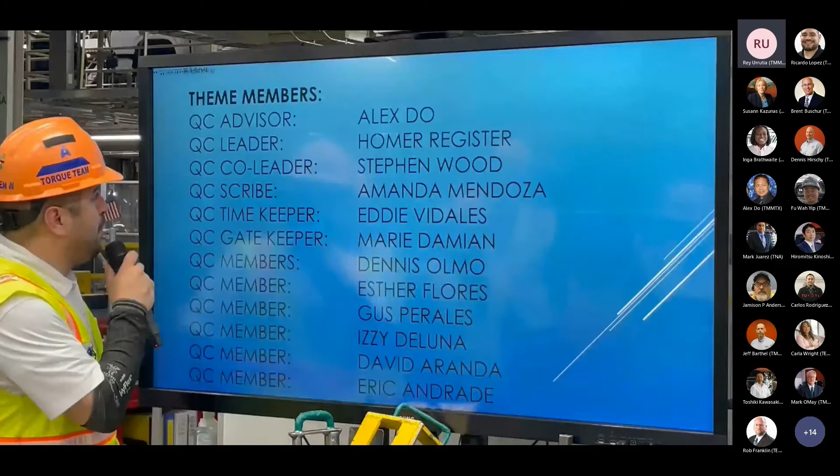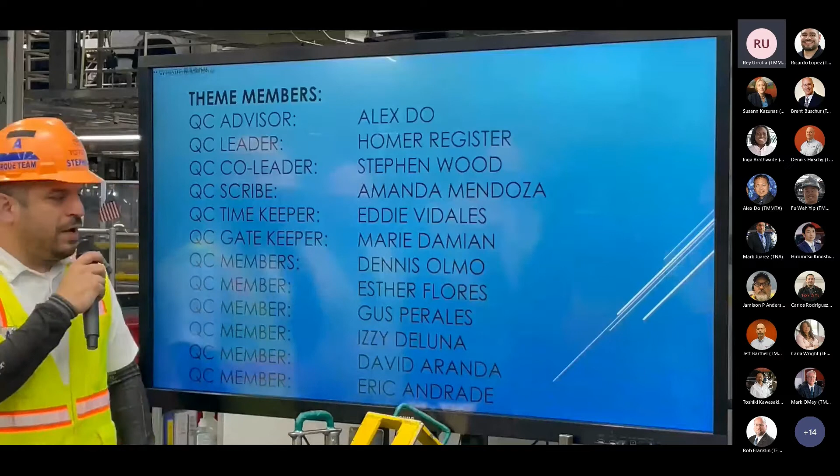Our theme members are Advisor Alex Do, our leader Homer Register, our co-leader Stephen Wood, our scribe Amanda, our timekeeper Eddie, our gatekeeper Marie, our members Dennis, Esther, Gus, Izzy, David, and Eric.

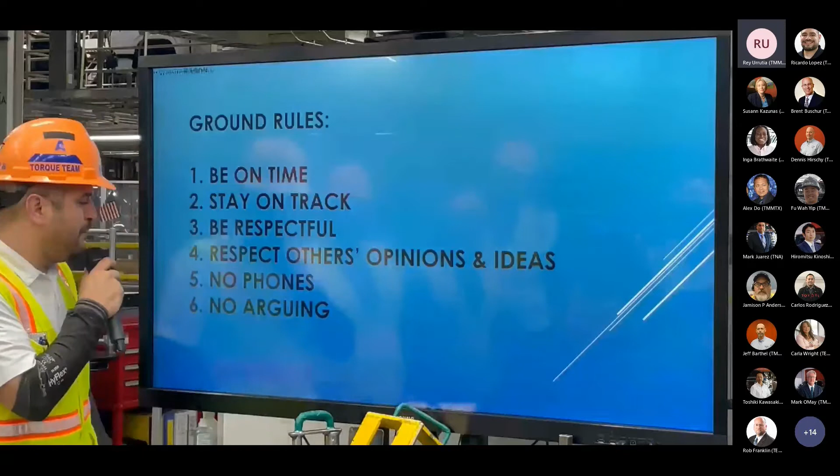Our ground rules are: 1, be on time; 2, stay on track; 3, be respectful; 4, respect others' opinions and ideas; 5, no phones; 6, no arguing.

The first step we had was clarify the problem: reduce the potential safety risk for Torque team members while performing their processes.

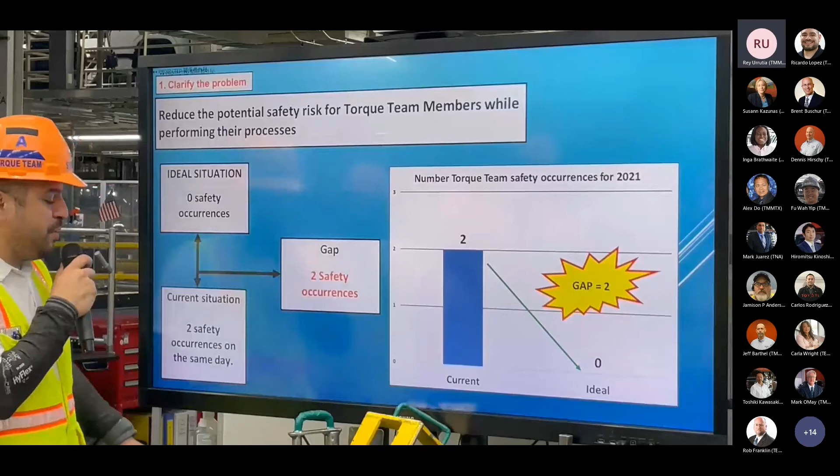The ideal situation is 0 safety occurrences. Our current situation is 2 safety occurrences in the same day, with a gap of 2 safety occurrences.

The number of Torque team safety occurrences for 2021 was currently 2, with the ideal of 0, a gap of 2.

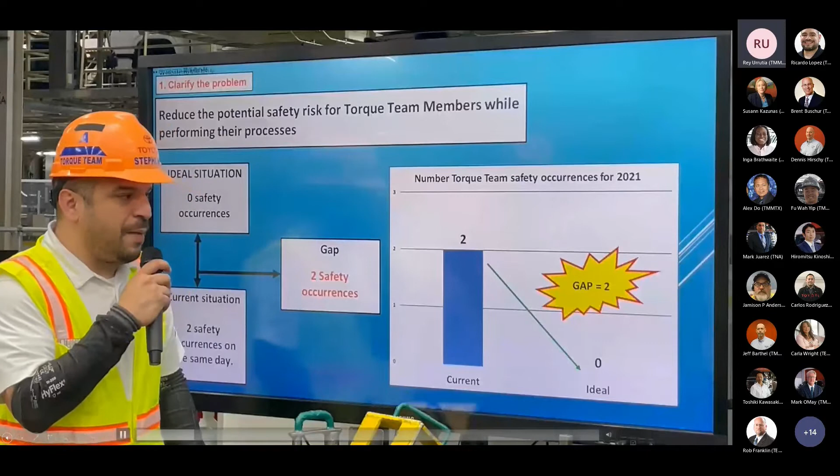Thank you, Stephen. Step number 2 is breaking down the problem. Assembly Torque Team 2021 safety incidents at 2.

All other issues 0. Knuckle assembly falls off skillet during torque checks is 2. Tundra 0, Tacoma quantity of 2. 4x4 0, 4x2 quantity of 2.

Lower ball joint torque check 0. Castle nut torque check 2.

Torque team member prepares for torque check. Torque team member notifies team member that they are going to check the next truck's castle nuts. Team member shoots castle nut, leaves castle nut to have its torque checked by torque team member. Torque team member checks castle nut, then checks to see if castle nut is lined up for cotter pin.

Our point of occurrence is if castle nut is not lined up to accept cotter pin, torque team member toggles castle nut. Torque team member leaves castle nut ready to accept cotter pin. Process team member finishes standardized work.

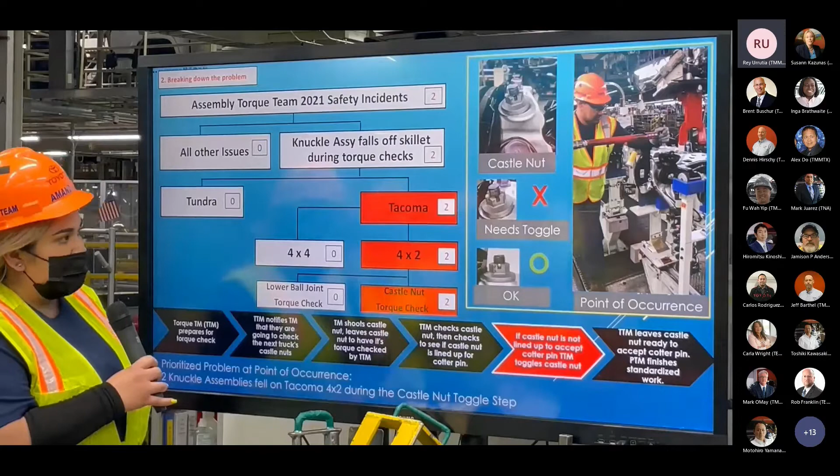Our first picture up here is a castle nut. This second picture is a castle nut not lined up, needs to be toggled. Our third picture is the castle nut lined up perfectly for a cotter pin.

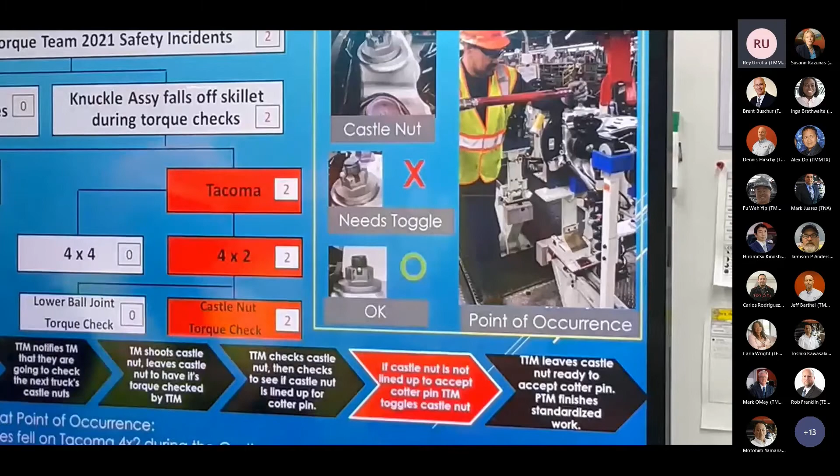Prioritize problem at point of occurrence: 2 knuckle assemblies fell on Tacoma 4x2 during the castle nut toggle step.

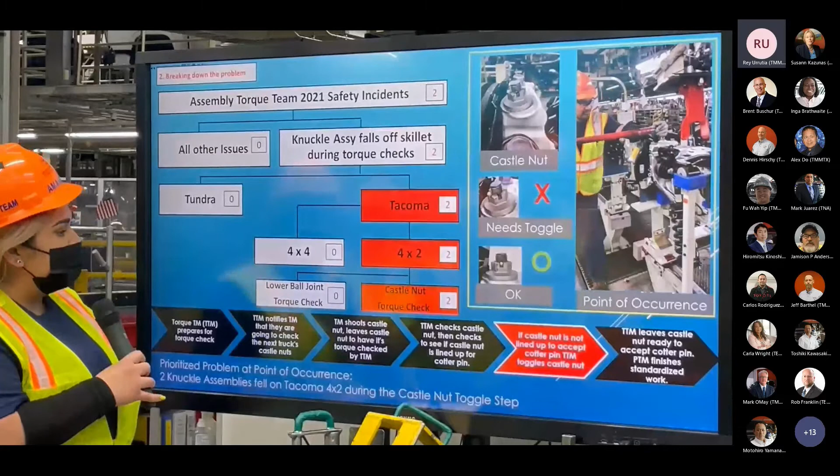On the next slide, we'll have a video of our point of occurrence. No good condition. Unstable without the use of a knuckle holding jig. As you can see at the bottom of the stand, there's no jig there, which leaves the A-arm open to fall open on torque checks.

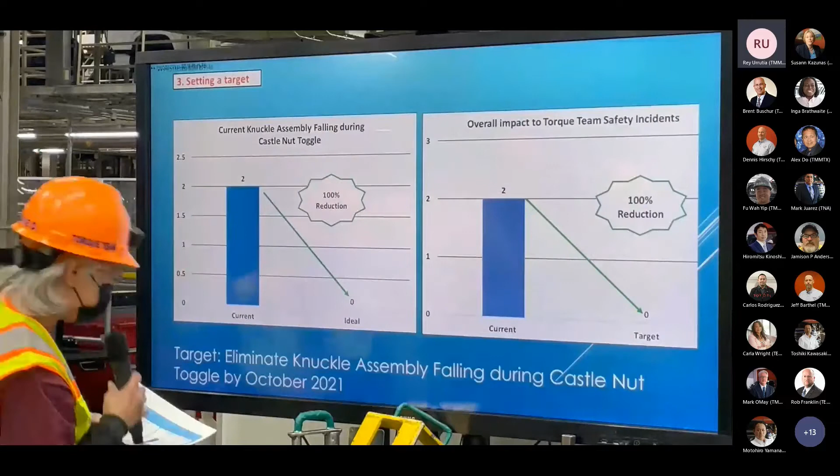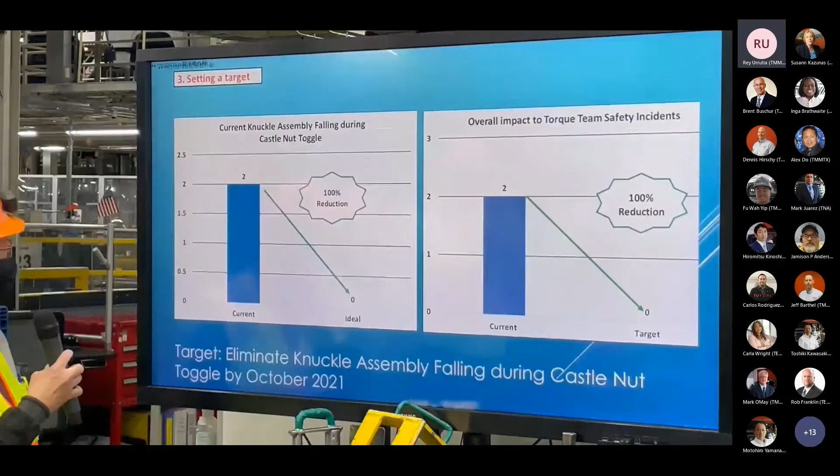Thank you, Amanda. Step 3, setting a target. The first graph shows the current knuckle assembly falling during castle nut toggle. The current situation is 2, and the ideal situation is 0, with 100% reduction.

The overall impact to torque team safety incidents: current situation is 2, target is 0, at 100% reduction. The target is to eliminate knuckle assembly from falling during castle nut toggle by October 2021.

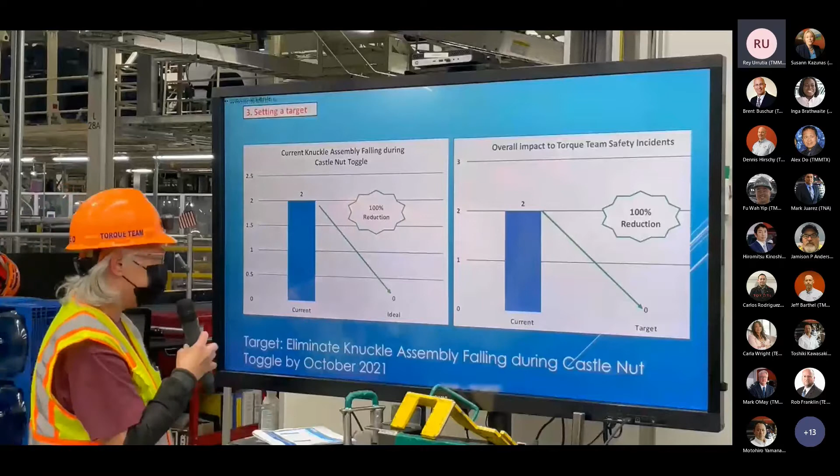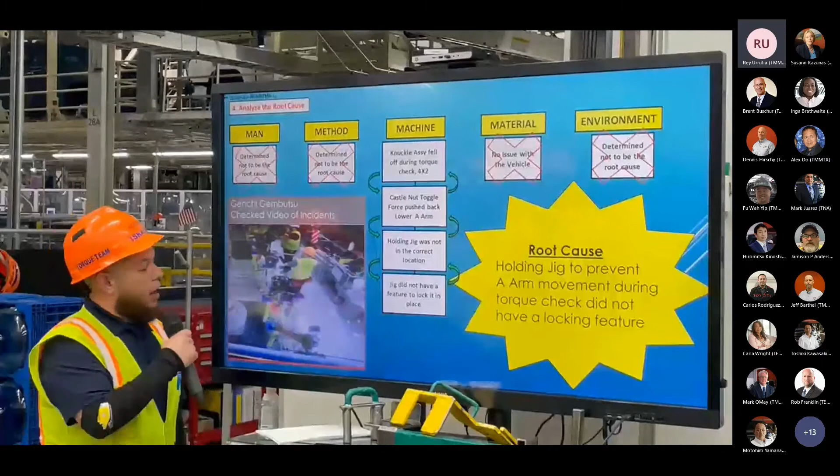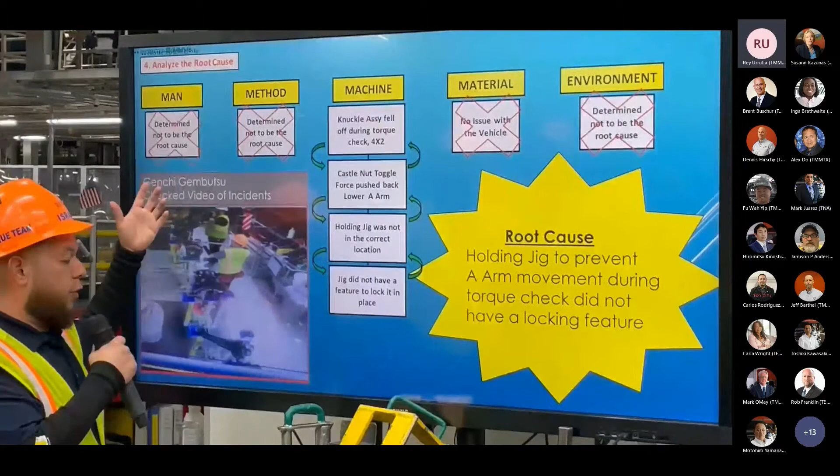Thank you, Marie. All right, number 4, analyze the root cause. So we analyzed the root cause, and as we did so, we eliminated man, method, material, and environment as potential root causes, and came to the conclusion that machine would guide us towards the actual root cause.

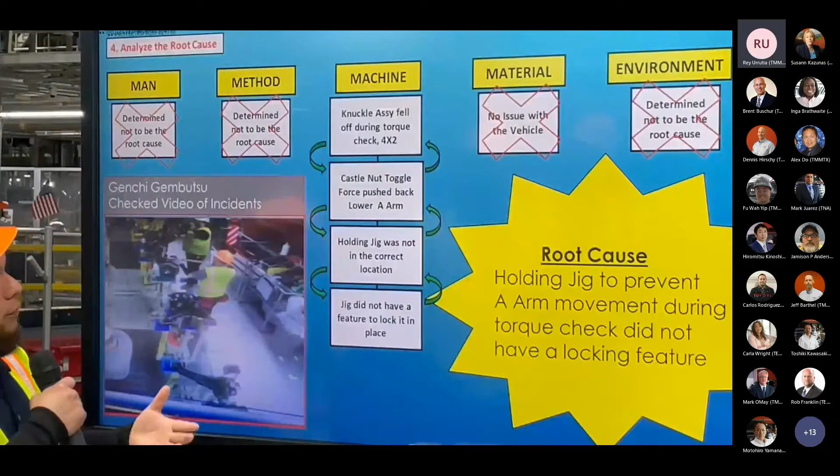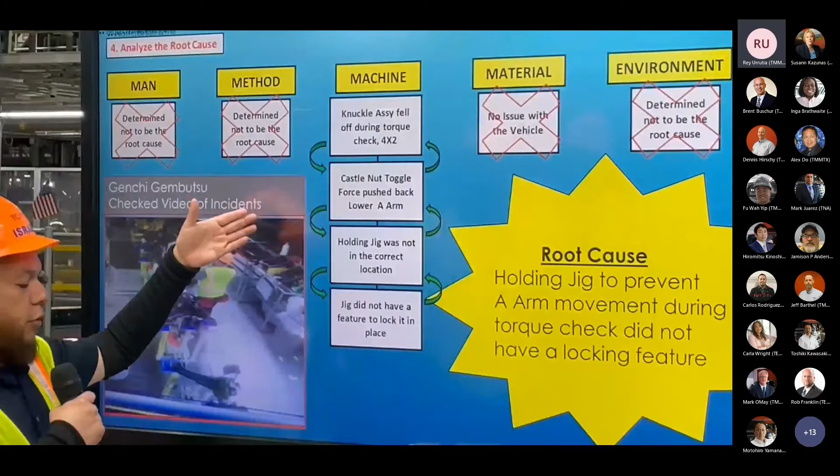So what happened was the knuckle assembly fell off during the torque check on a 4x2. Why? Because the force of the castle nut toggle pushed the lower A-arm back. Why? Because the holding jig was not in the correct location. Why? Because the jig did not have a feature to lock it into place.

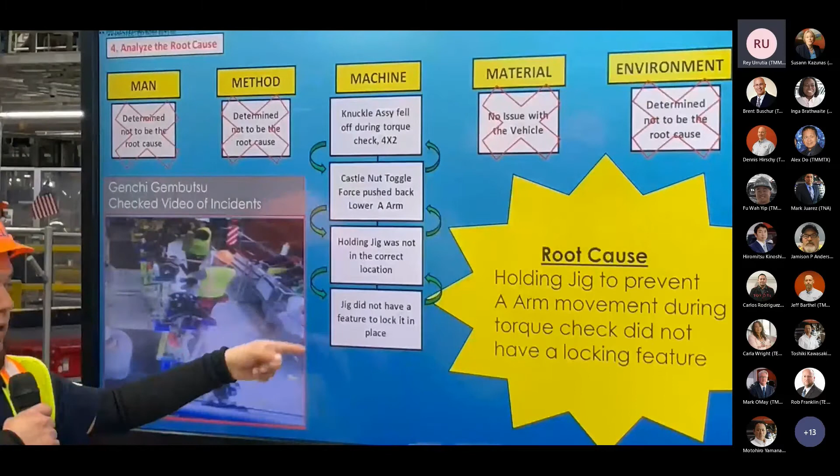This is the video. I was the actual team member that this happened to. If we can go ahead and roll the video: initially I take the torque check, and then next I have to toggle to allow the cotter pin to have a path. If you look right here, the holding jig falls as I'm trying to toggle. Team member comes over, team leaders come, and they try to help. This is the point of occurrence, and I'll be handing this off to Eddie.

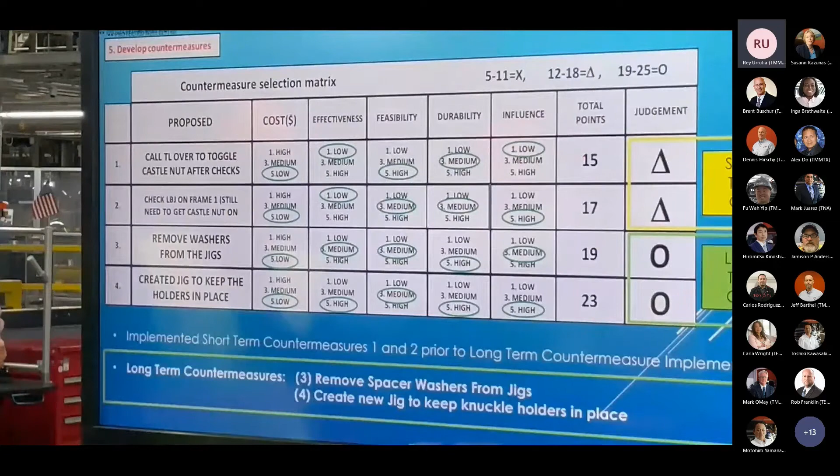Thank you, Israel. Next, we have step 5, developing countermeasures. Using the countermeasure selection matrix, we came up with 4 proposed.

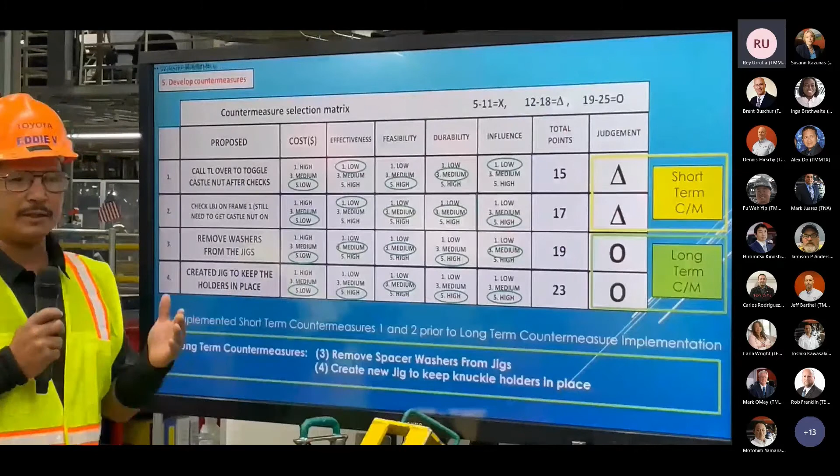The first one being calling team leader over to toggle the castle nut after checks, for a score of 15. The second one was torquing the lower ball joint on frame 1, still needing to get the castle nut on axle line, for a score of 17.

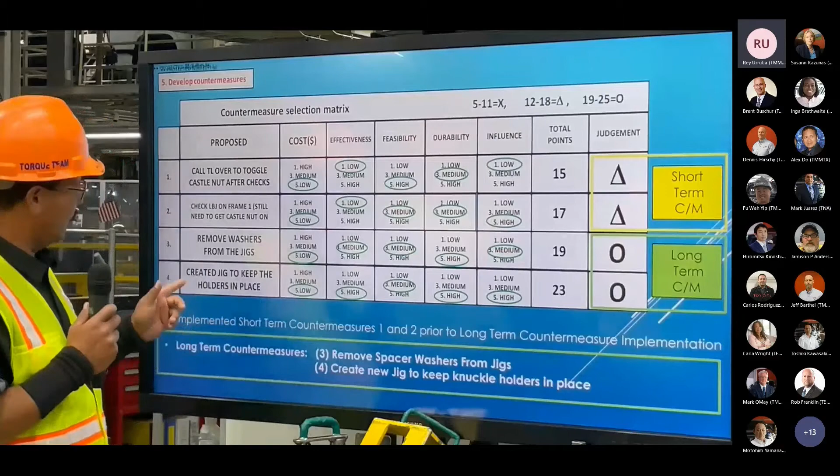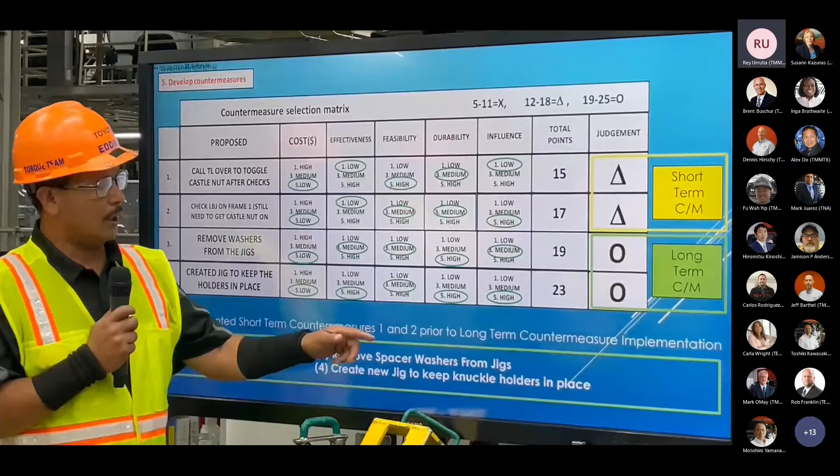The third one was removing spacer washers from the jig, for a score of 19. And the fourth one was to create a jig to keep the knuckle holder in place, for a score of 23. We implemented a short-term countermeasure for 1 and 2 prior to the long-term countermeasure implementation, 3 and 4.

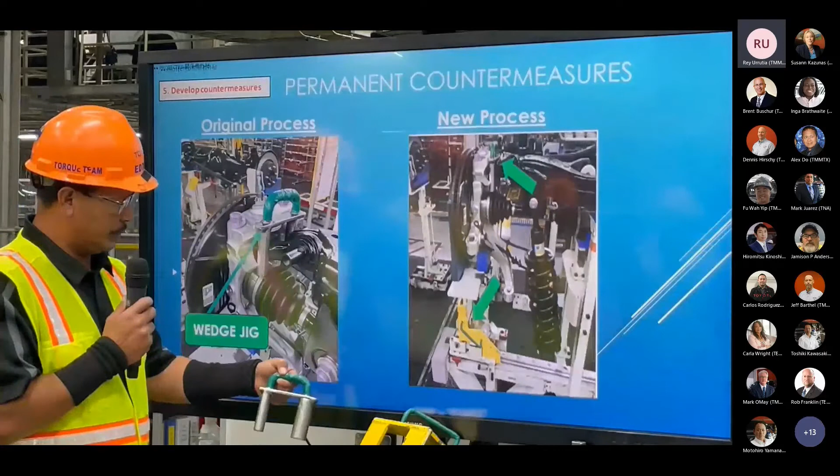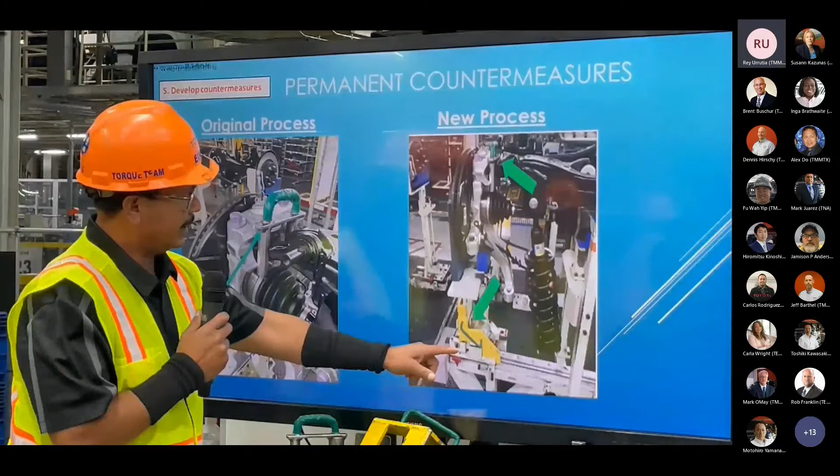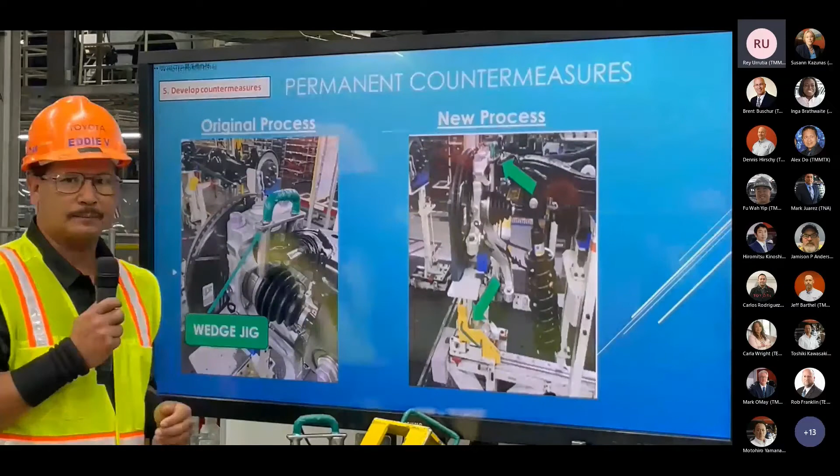On the next slide, we show the original process. Here's the jig that we use on the original process to keep the knuckle from rotating right and left. On the new process, here's the new jig that was made to lock in the knuckle arm in place to keep it from opening up, and still using the wedge jig in the process.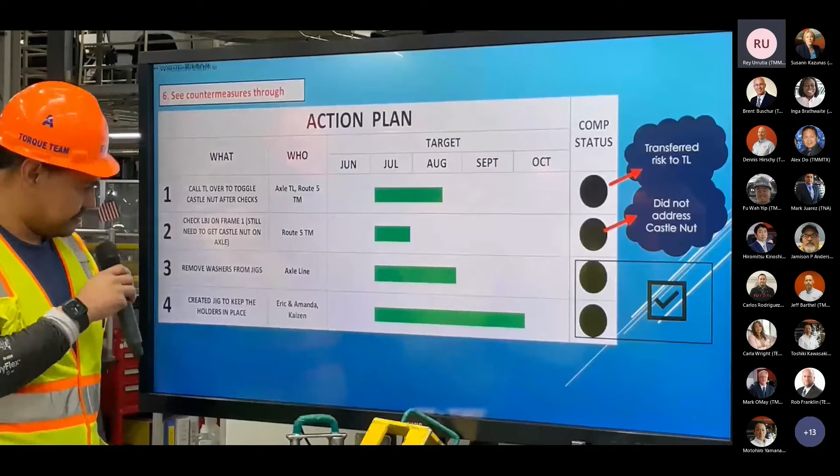Number 3 was remove washers from jigs, axle line, from the end of June to the end of August. Number 4 was create jig to keep the holders in place. Myself, Amanda, and Kaizen came up with this jig. This took place from June to the end of September.

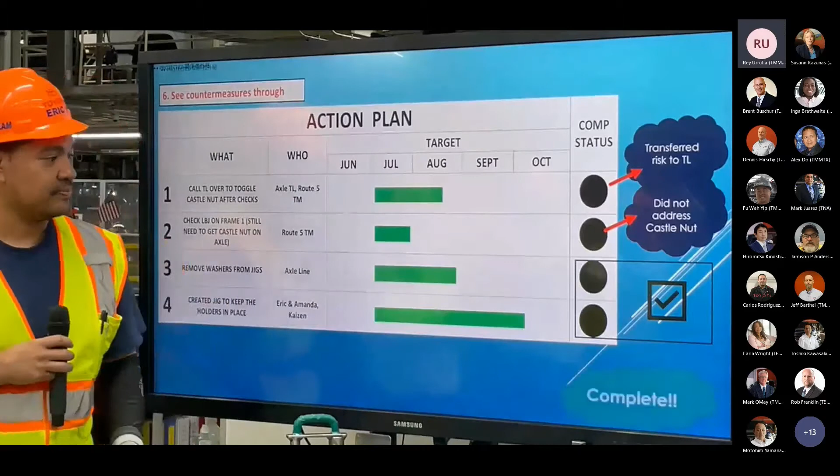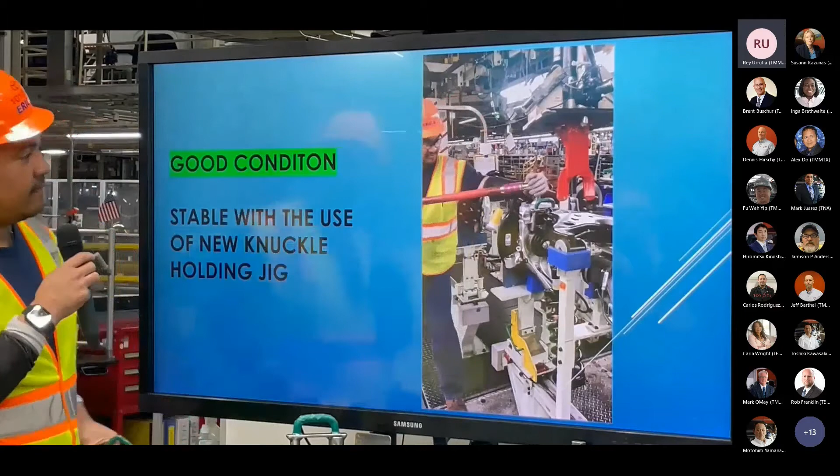We're complete. Here you can see the good condition stable with the use of the new knuckle holding jig. You see the jig on the bottom. You no longer see the arm moving back and forth. On top, it is a stable jig.

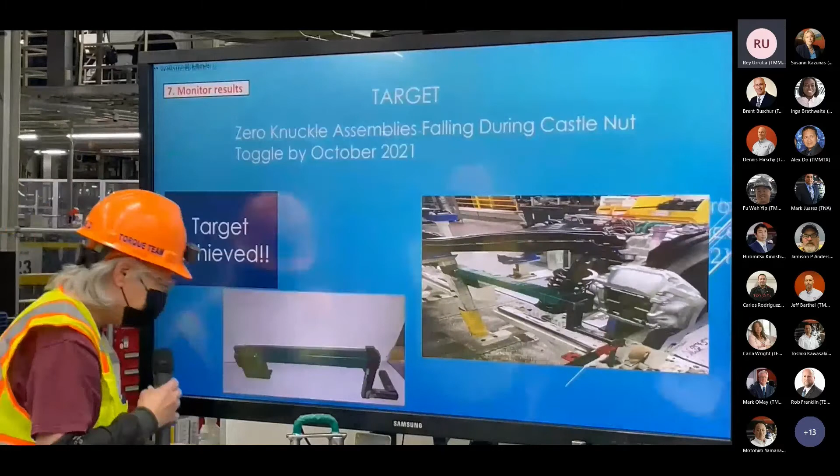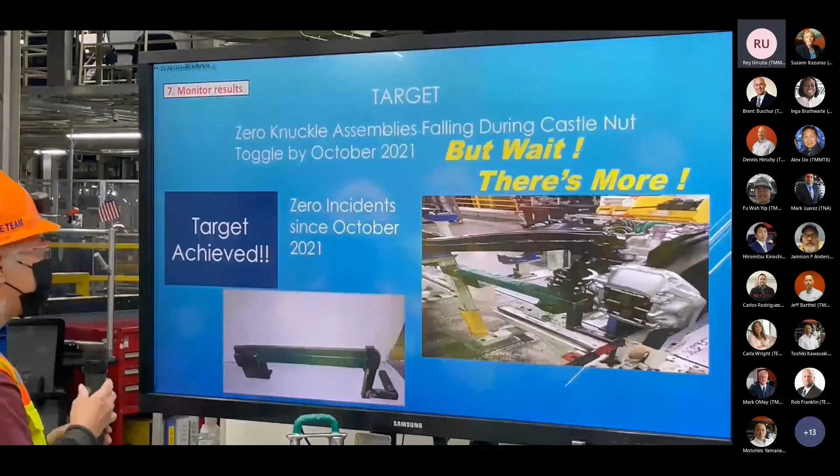Step 7, monitor results. Target: 0 knuckle assemblies falling during castle nut toggle by October 2021. The target was achieved with 0 incidents since October 21. But wait, there's more. Production further Kaizened the new jig to improve quality, which is seen in this screen.

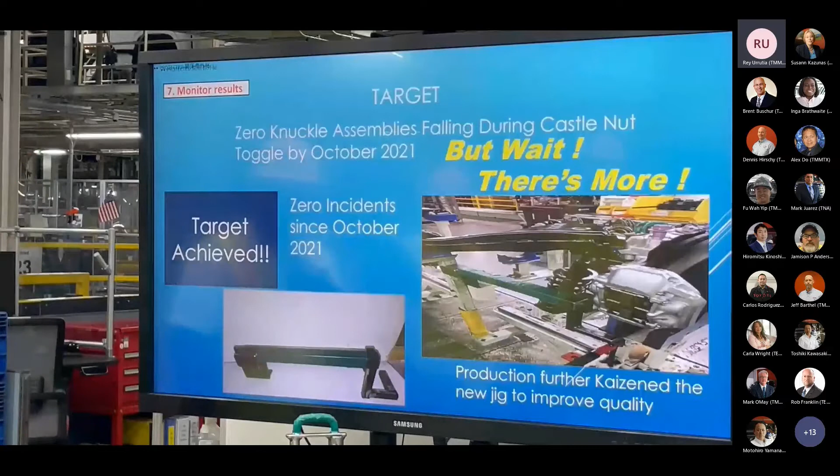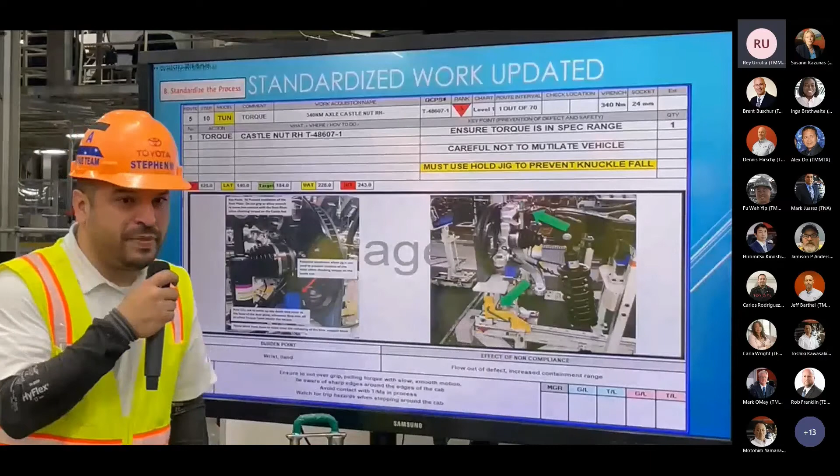For step number 8, we standardized the process. The standard work update we performed was for both castle nuts, left and right hand. The key steps we added were: previously ensure torque is within spec range, careful not to mutilate, and the key step we added was must use holding jig to prevent knuckle from falling, as you can see in this picture here.

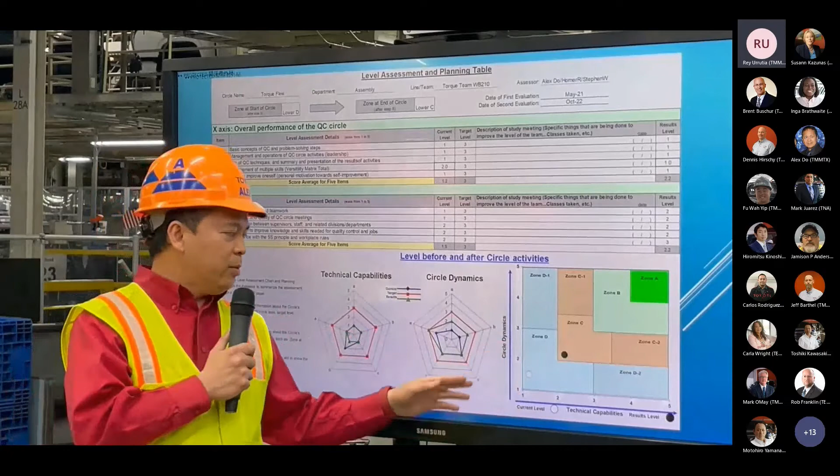Take a look at our level assessment and planning table. We utilize the checkpoints here. At the beginning of our QC circle activity, we rated ourselves at the lower D zone. As we developed through the QC circle and understood the steps to the process, towards the end we rated ourselves again and established that we're at a lower C zone. So we made an increase from a D to a C zone with our learning steps.

So that about wraps it up. But before we do, let me see a show of hands of who learned something from this project. Wow, everybody. Hey Eric, why don't you share with us what you learned?

I learned to be more open-minded to collaborating with others. Before, I would just jump in a project and do trial and error. Sometimes it would take days or whatever. So I learned by collaborating with others to get their ideas and info that it makes for a smoother and faster process. All right, great, Eric, thank you.

Amanda, please share with us what you learned. Of course. I was able to learn how to go through the 8-step process of solving an issue to keep our environment a safe working area, not just for individuals, but the whole team. Great, thank you, Amanda. But wait, there's more.

Izzy, please share with us. Thank you, Alex.

I learned that here at Toyota, Texas, safety really is priority one. At the point of occurrence, I had team members and team leaders help get the axle back to where it needed to be. As soon as we decided we were doing a QC circle, we knew this is where we needed to attack because it is a safety issue and we want to prevent any future occurrences. There were plenty of minds that helped make sure this issue never happened again.